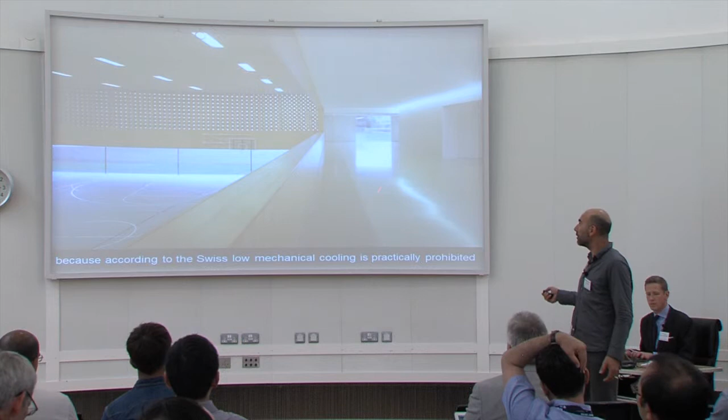So why ventilative cooling in non-residential buildings? There are many reasons to apply ventilative cooling, but in Switzerland there is one single reason that obliges you to do that: in the new regulations, according to the new Swiss energy law, mechanical cooling is practically prohibited. Why? Because when you build a building in Switzerland, this is a naturally ventilated and cooled gym. We did it before the law because we are a spin-off company of a technical university, so we try to be in advance on the regulations.

In the new regulation that Claude-Alain Roulet edited, maybe some of you know him, you have first the obligation to have a perfect solar control. I will speak to you about this later.

Then you have the obligation to provide the opportunity to the users to have natural ventilation and night ventilation. So your calculations are done considering that you have the opportunity to apply night cooling. And then there is a third obligation about thermal mass. It is almost impossible to have raised floor and suspended ceilings and cupboards around on the walls, and have no thermal mass.

There should be at least one element with thermal mass according to these new regulations. And if you apply these measures on the building, and you have too much internal gains, then you have additional obligations. For example, if you have more than 30% of glazed surface area, you have to have automatic blind control, not only manual. And there are some more obligations about thermal mass.

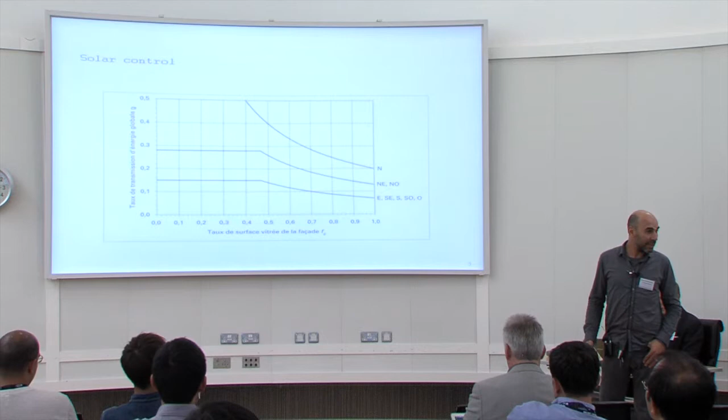How do we use them? For many years we have been designing real buildings. I start with solar control.

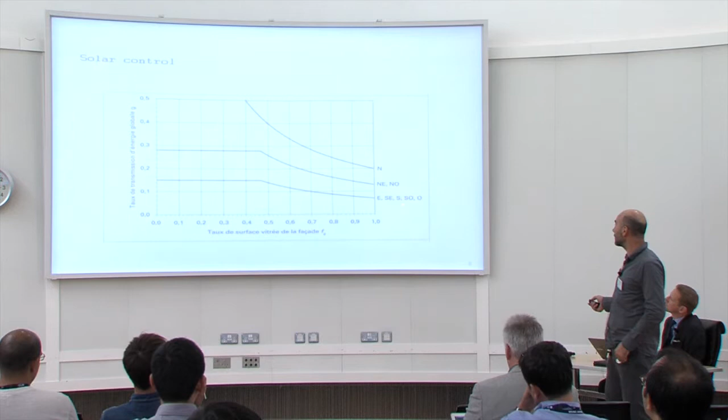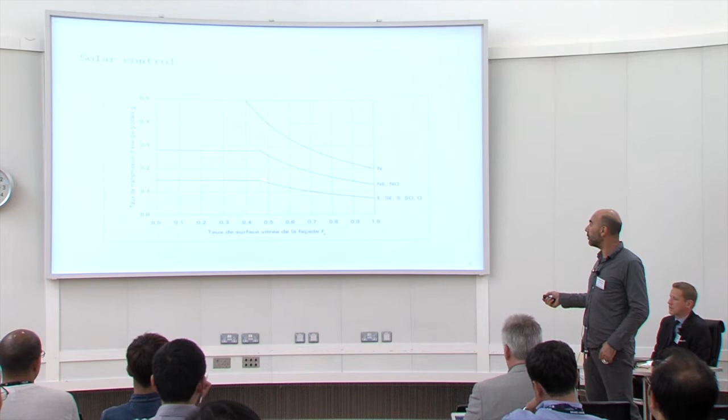If you see this graph, which I took from the last regulation, it depends on the orientation of the facade. If you take the east, southeast, south, southwest, and west facade, according to the percentage of glazed facade, it is 0.15, and if you have more than 40% of glazed facade, then you go up to 9% solar protection. It is almost obligatory to have movable blinds to achieve this performance. In the north, it's possible to have less.

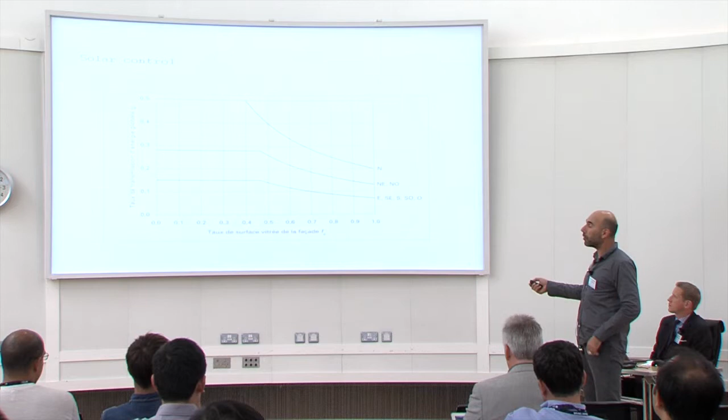So I'll show you some other solar control solutions that are not the standard one we usually have, some ways to go beyond outside Venetian blinds. With these graphics, I show you it is almost impossible to have internal blinds for the south, east, and west facade.

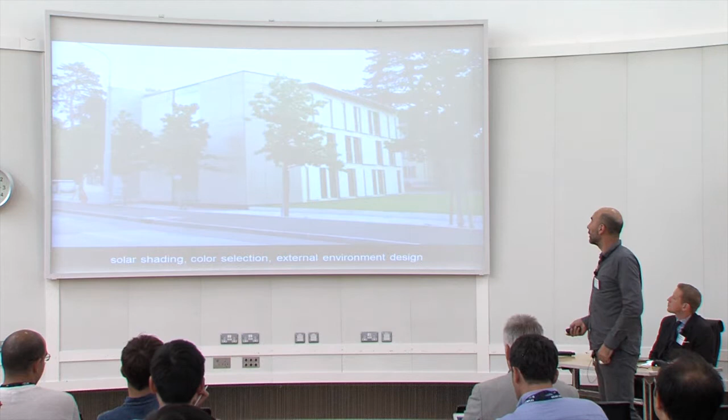We never achieve 9% solar protection with internal blinds. Here you have one of the first eco buildings labeled Minergie in Geneva. We did it in 2003, and you see some facades without blinds, but this is because it is the north facade. The same building on the west facade has another kind of facade with solar shading, paying attention also to the colors and to the outside environment, so that we have the solar control.

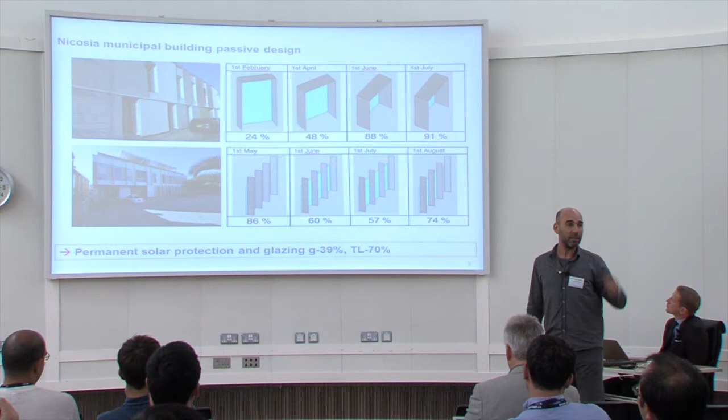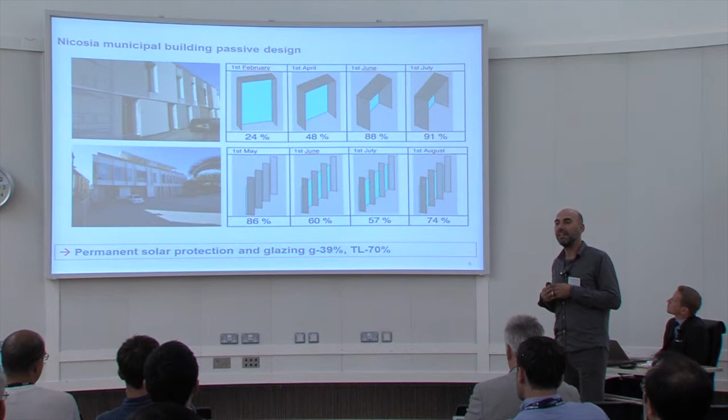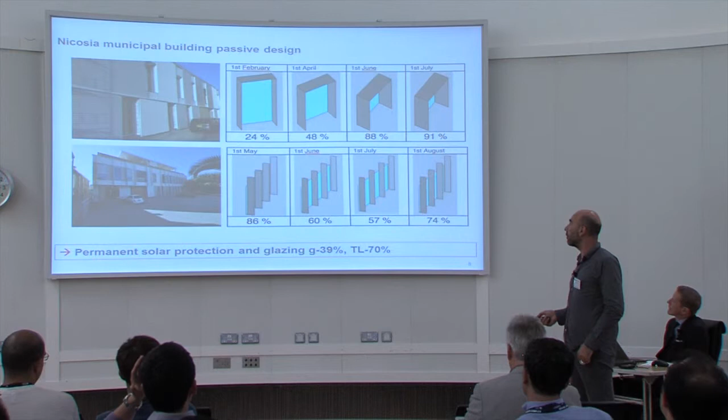There we have the chance that the sun is higher, and we can play with passive shading. So we designed the depth of the south facade - we're not exactly south, we are 15 degrees off. So in the north facade, and particularly the northeast facade, we had some important solar gains 2 hours in the morning. So we added some protection also in the north facade, combining passive shading and selective glazings, while paying attention to have enough solar gains for winter.

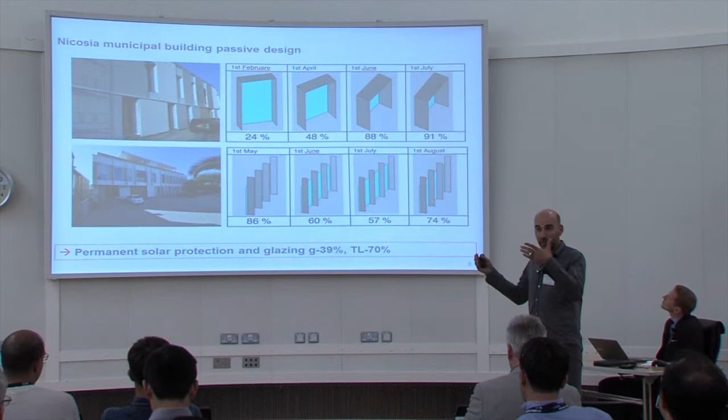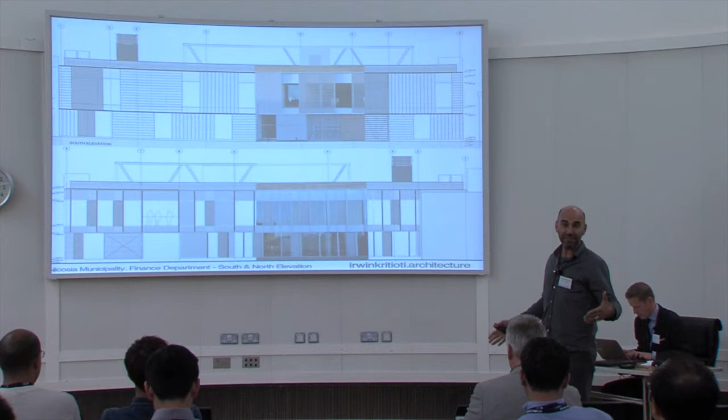There we almost have no energy needed for heating because it is enough from these windows to heat the building. We managed to have solar control, but you see the facades are designed differently - the north and south facade are completely different. We have the chance not to have an east and west facade because there were other buildings there, so here we have the real north facade and the real south facade.

We managed to get ventilation from the side and to have a fixed glazing. This is a technique we use very often because now glazing is very huge and heavy to open, so we try to dissociate light from air inlet, and it is very practical. I have a chapter on how we design natural ventilation.

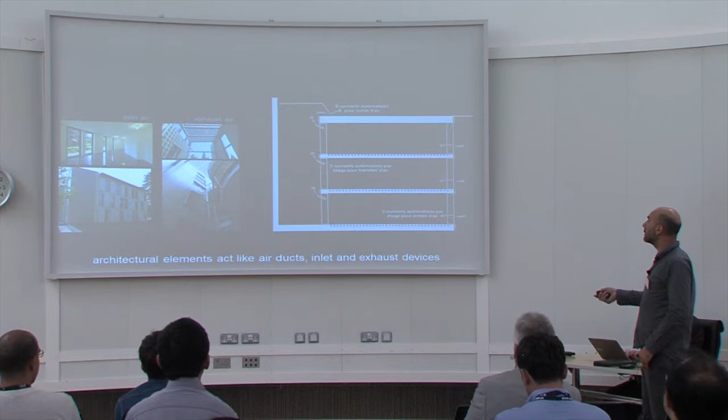Here's a very simple building with 3 levels, where we use the staircase and some internal windows so that everything is opening, and two windows per story are automatic, so we are not relying on the users' behavior.

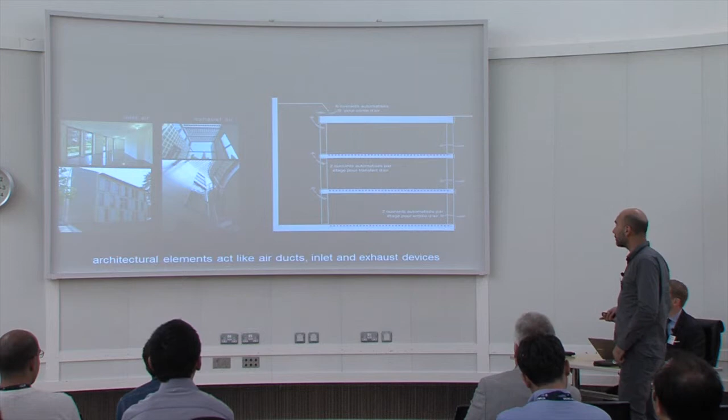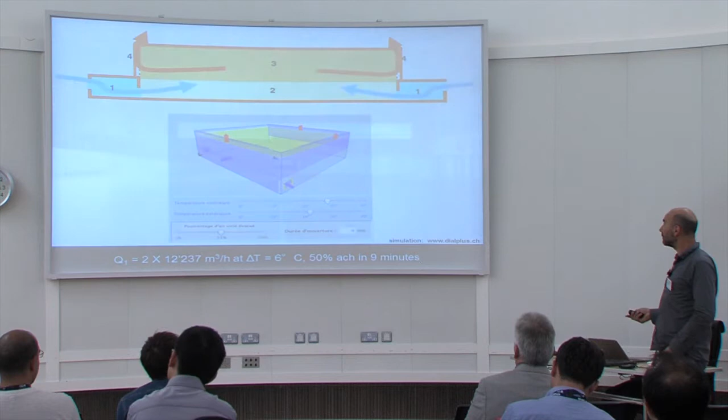Here is the gym I showed you before. We take the air in through the storage rooms, and the doors are perforated so that the air goes into the inside area. We managed to dimension the inlet and outlet openings so that the neutral level of the building is very high, and we have air going into all the levels. And here is the result - the air is coming from these doors, and from the rooms behind.

Since I don't have thermal mass in this area, this is the reason I pass the air through the storage rooms, because they are concrete - so I can store it. It's like an appendix of thermal mass for the main room.

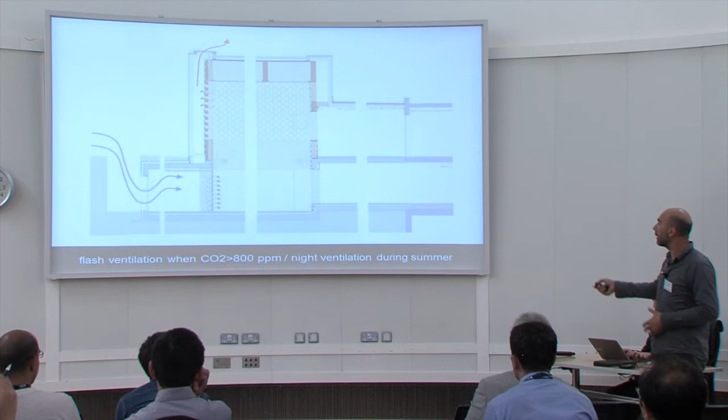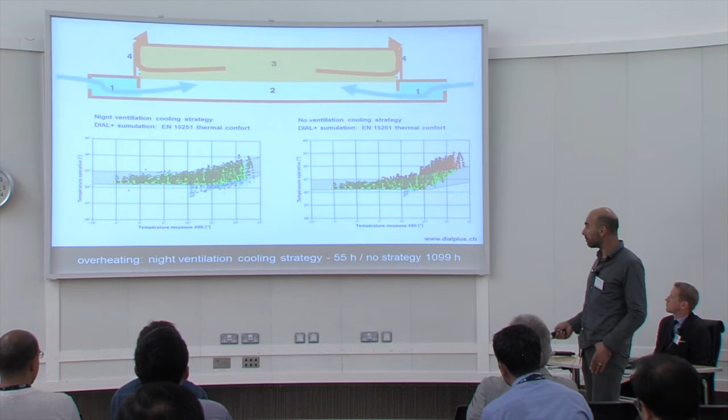And here is the strategy to evacuate the solar gains. Here is the behavior of the building. This is the curve I told you before, which is the control, the comfort is the EN15251. Here is with night cooling, and here is without night cooling. This is why in the Swiss regulations now night cooling is almost obligatory. So here is the behavior of the building with night cooling and without night cooling.

The simulated and the real one are very near. Here is the building I have shown you before in Nicosia, the town hall, which is a mixed building with activities inside.

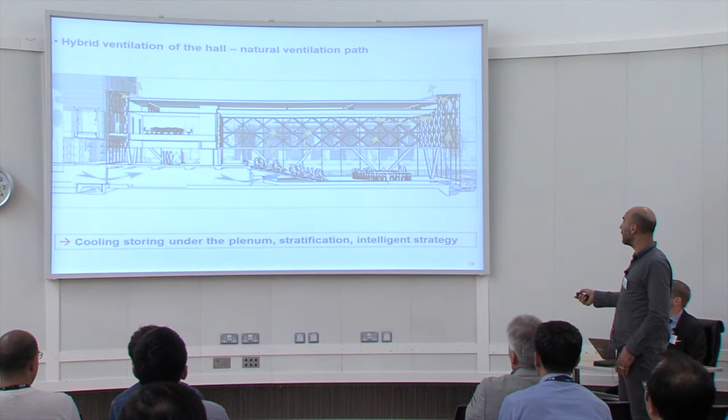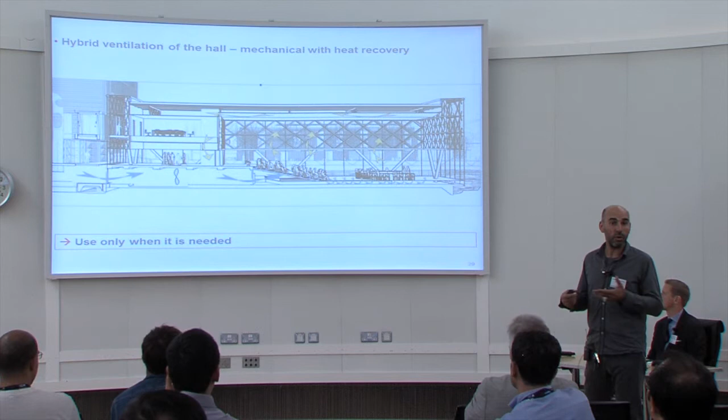The ventilation strategy is double. We have the natural one that goes the same path as it takes also with mechanical, when the external conditions do not allow using the external air because it is too hot or because there is not enough stack effect. Here is the design of the openings.

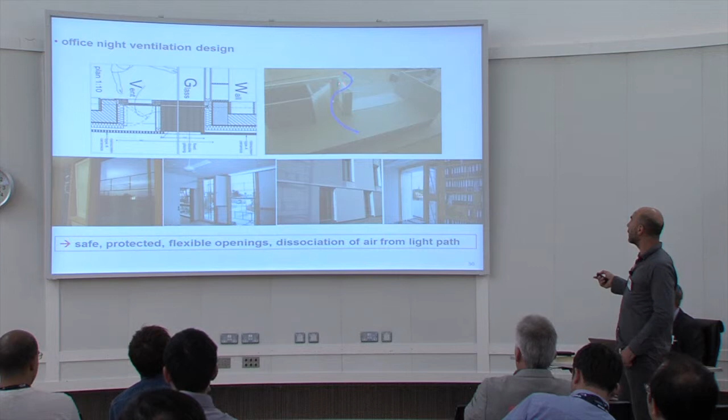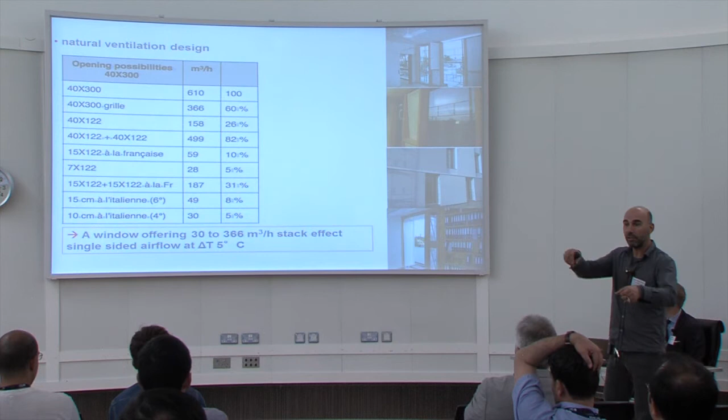We have only single-sided ventilation in the offices of the same building. It goes from the side of the fixed glazing, and we designed not a single opening so that the user may have different possibilities to open. If it opens one window tilted or one window completely, or both windows tilted or both windows completely, we have between 30 and 600 cubic meters per hour at 5 degrees temperature difference. So we give the possibility to the users to play with natural ventilation according to the needs.

So you see, it's not just openable windows. It depends how big they are and how they can open.

Here is another building in Switzerland where we also dissociated the fixed window from the openable. This is the north facade of the building, which is why you don't see solar shading. And here is from the inside.

You have a very pure line for the view, and a separate openable, protected ventilation system. Here they are producing watches which cost maybe 10,000 or 15,000 pounds, and they are on the desks doing natural ventilation with openable windows, because we designed the openings to conform to the needs.

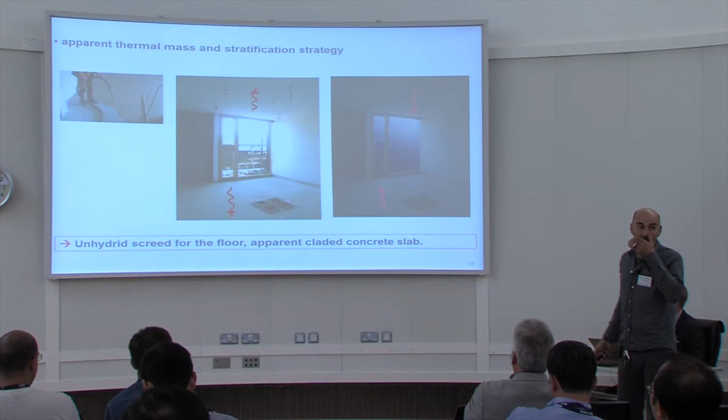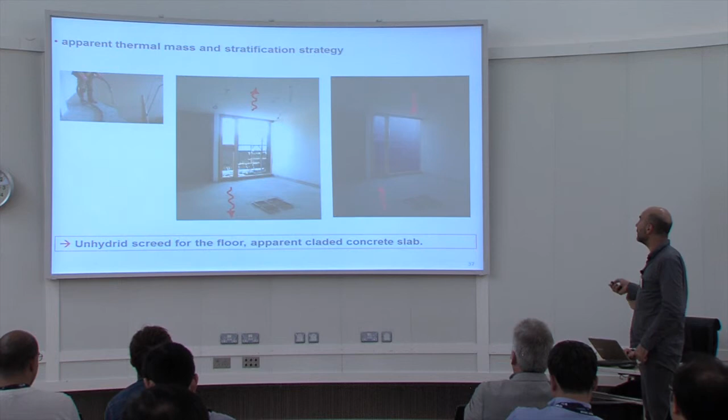Thermal mass - without thermal mass, all these strategies don't work, we only use 50% of the potential. So here, for example, we use anhydrite screed and concrete roof, and here is the behavior we have simulated for the heavy building.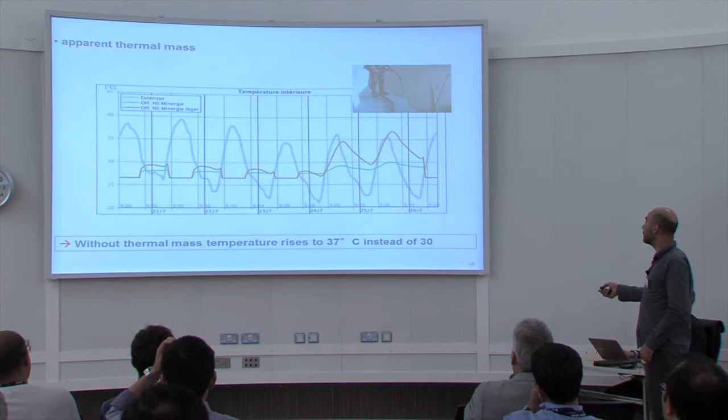This is in Cyprus, so it is air conditioned in summer because we cannot have only natural cooling. You see during the weekend, a light building goes up to the external temperature while the heavy building remains cool. Also the stratification strategy.

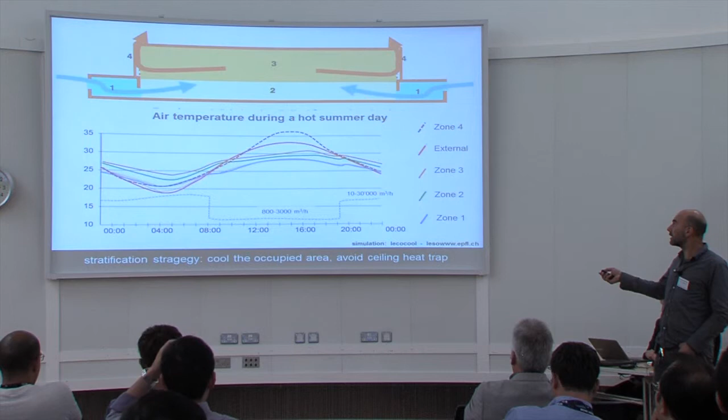Here we play with the stratification so that we have the cool space where the people are, and we can accept some more overheating where there are no people. Here also we use the thermal mass of the staircases and of the offices.

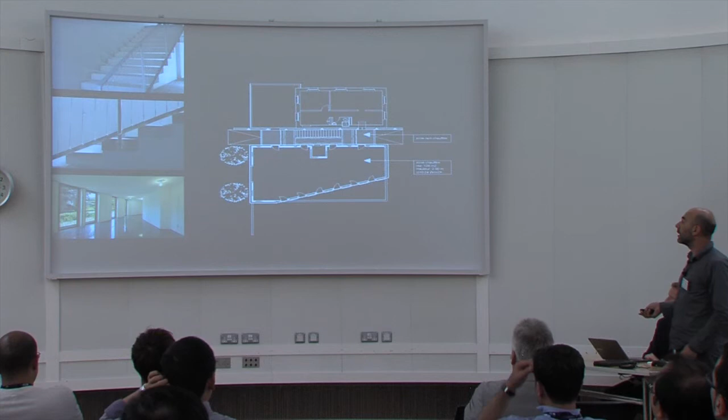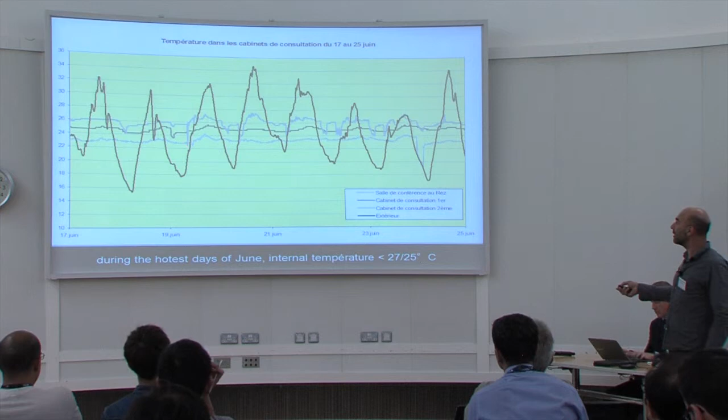Sometimes you cannot have the same temperature on all 3 stories. Here in this 3-story building, these are our measured temperatures - we are always in the comfort zone, although outside it's 34. On the ground floor it's very cool and never over 25, and on the last floor we have up to 27.

So here are the passive techniques we are usually using, the last slide. Always almost perfect solar shading - without solar shading, it is nonsense to speak about natural ventilation. You use natural cooling just to make better the horrible situation with all these heat gains.

Thermal insulation, now with the new regulations, almost every country builds insulated buildings. High apparent thermal mass, optimal dimensioning of glazing for passive lighting, heating, and solar protection - not only solar protection, we need heat in winter, and we need light. So it's a trade-off to do for every facade.

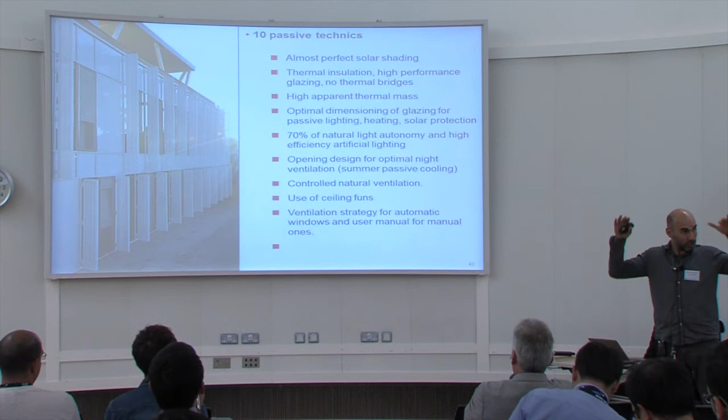70% of natural light autonomy and high efficiency artificial lighting, so that we reduce the solar gains. Opening design for optimal night ventilation, for summer passive cooling, and control.

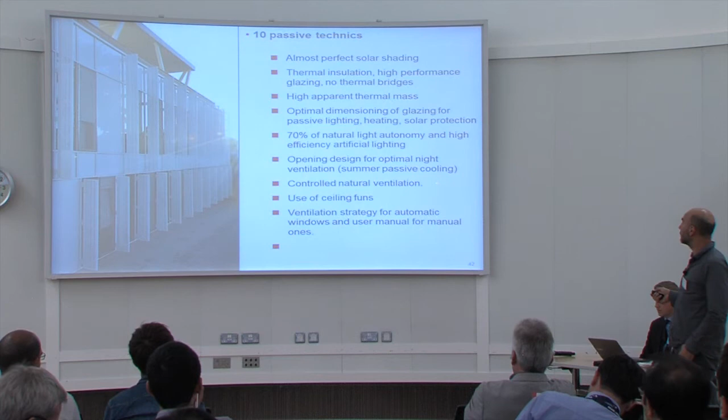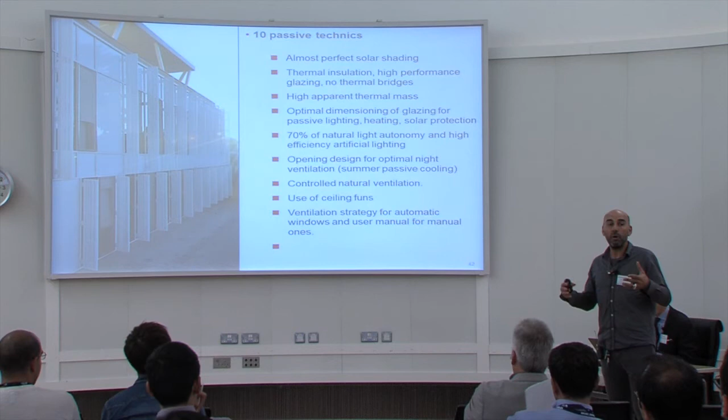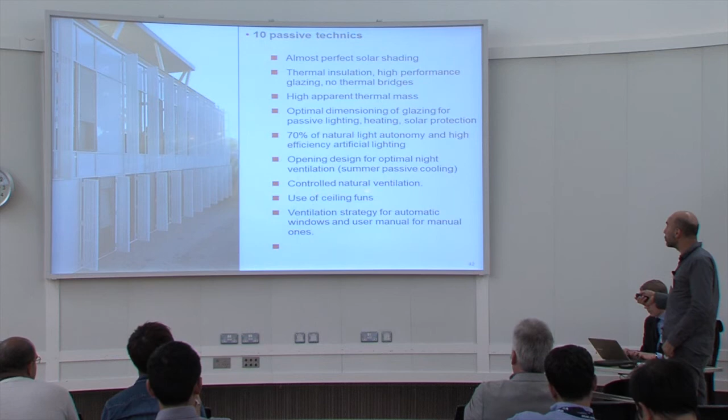Many of these low energy buildings, they don't use this. They are very good because they think they have heat recovery, and they think that this is enough. And they have some openings that they didn't think about, and it is too hot because there is no appropriate design for summer cooling. So, control natural ventilation - not just natural ventilation according to wherever the architect thought to put the windows.

And ventilation strategy for automatic windows, or user manual for manual ones. We cannot just leave the building like this. Every apparatus you buy, you have a user manual, but not for the building. If the building is not automatic - and if it is automatic, you need a user manual for the person who takes care of the automation, and you need one also for the users.

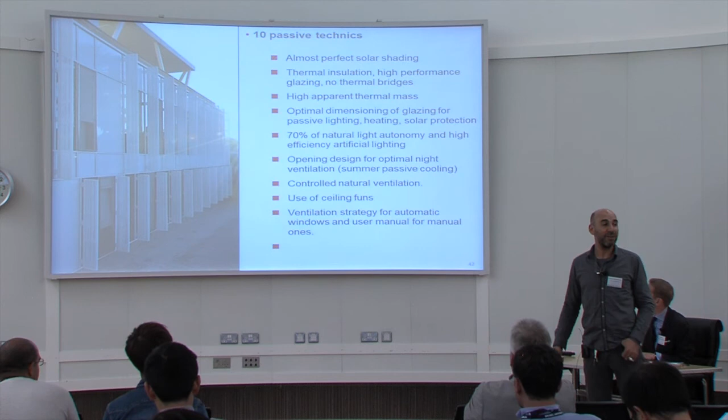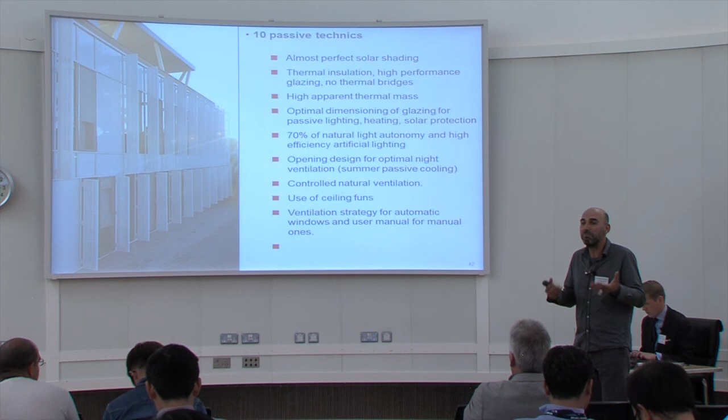The last one, because there are 10 points - this is for the designers. You cannot do all this without simulating. I am 15 years in this job, and I don't have the feeling to believe on my own, to be confident on my beliefs. I have to calculate, at least a rough calculation, before I say that this is good or this is bad. Thank you very much.